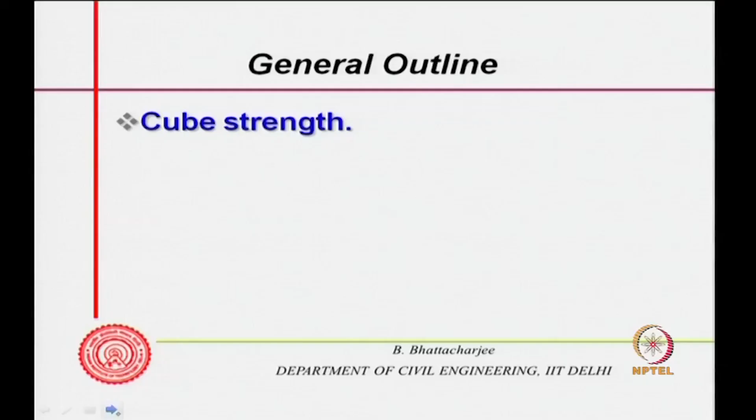The general outline is: cube strength, I will mention why cube strength quickly, then fracture mechanism, and what affects the strength, the mix parameters largely, or basic mechanics. So the mechanism of failure and all that we will look into in this lecture.

Strength of concrete is needed for structural design, and usually we determine it through specimen testing. Since concrete is a structural material and we make structures out of it, strength is required for structural design, because safety is a primary issue. So we determine strength of concrete by specimen strength testing, and the determined strength depends on specimen type.

It depends on specimen type, and of course also on test conditions. For example, strength of a cylindrical specimen is lower than a cube of the same concrete, and in-situ cube strength in a structure is lower than both. So you see, it depends upon the type of specimen you test.

In the Indian scenario, we test cubes, and that is why this heading is cube strength. Not only in India, but Europe and the UK, from where the concept of cube strength came to India, also use cubes. Largely North America, South America, and Japan use cylinders. So the type of specimen is very important, and the test condition also affects the strength.

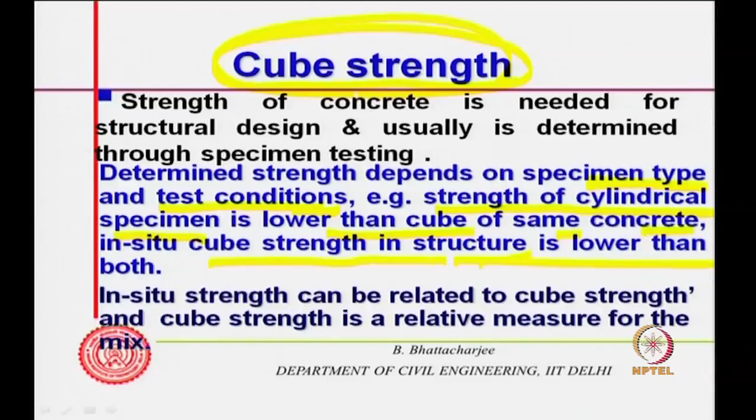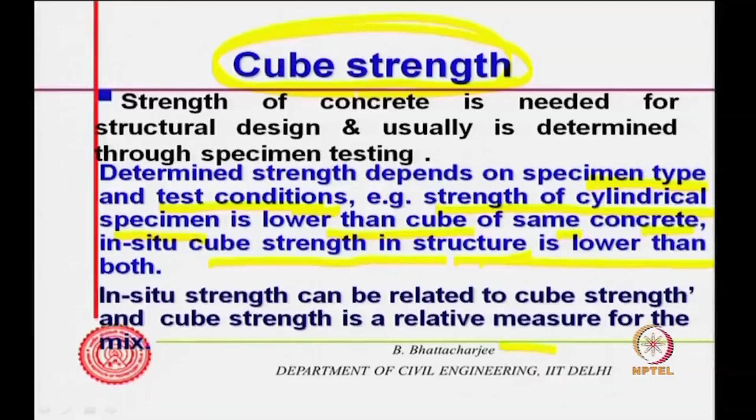Now, in-situ strength can be related to the cube strength in some manner. And therefore, cube strength is a relative measure of the mix that I am using.

We have looked into mix proportioning, its making, casting, and the procedure of production. So basically, since the cube is prepared separately and not taken from the structure, cube strength largely measures the relative strength potential of the mix proportion. Structural strength in the structure is somewhat different, but this relative strength potential can be related to the actual strength one can expect in a structure for design purposes, and therefore can be used in structural design.

Let us see how a cube fails. This is the failure pattern of uniaxial failure. That means I have applied some sort of load on a cube specimen. This is for the cube specimen.

Since in the Indian scenario we largely test only cubes, we will be talking more about cube strength, and many other countries follow the same. In a cube, you apply load through machine platens, maybe a circular one, and the reaction comes from the bottom. Once you have applied load and made it fail, it will fail like this.

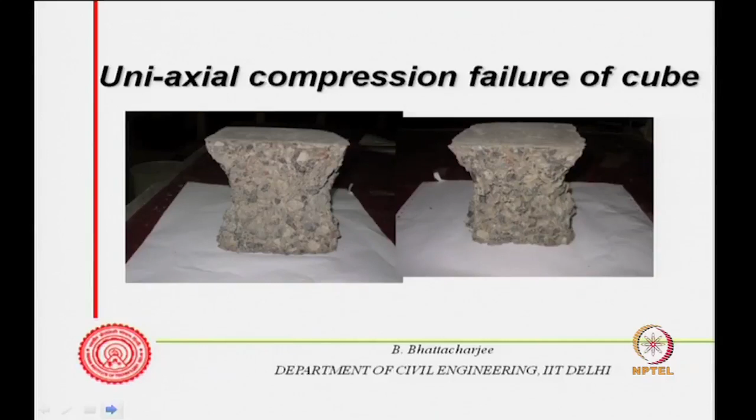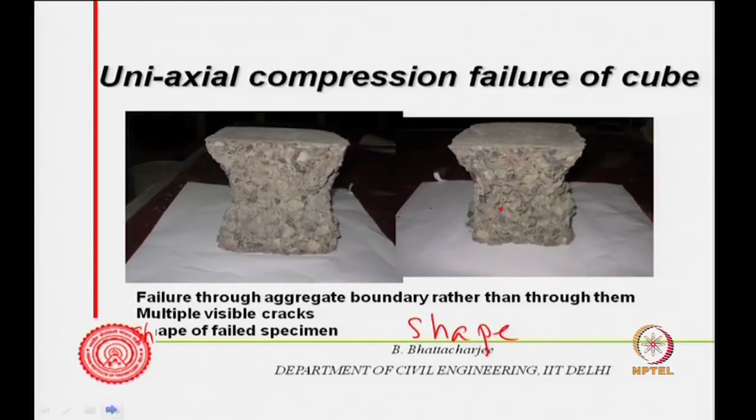This is another diagram from another side, showing that aggregates are exposed and do not fail in normal strength concrete. Failure occurs through the aggregate boundary rather than through the aggregates themselves, and you can have multiple visible cracks. This is the shape of the failed specimen as we have seen. We will explain why we get this shape, but one thing to understand is that in normal strength concrete, failure is through the aggregate boundary rather than through the aggregates themselves.

Fracture plane would be passing at the aggregate boundary, and maybe passing through some mortar and then again through aggregate boundary. If we take a portion of that fracture plane, uniaxial compression failure in normal strength concrete will look like this - these are the aggregates and the mortar around, and you can have multiple cracks here and there, but the failure plane finally occurs through this kind of situation, breaking through the aggregate boundaries. So that is normal concrete, fracture plane passes through aggregate boundaries.

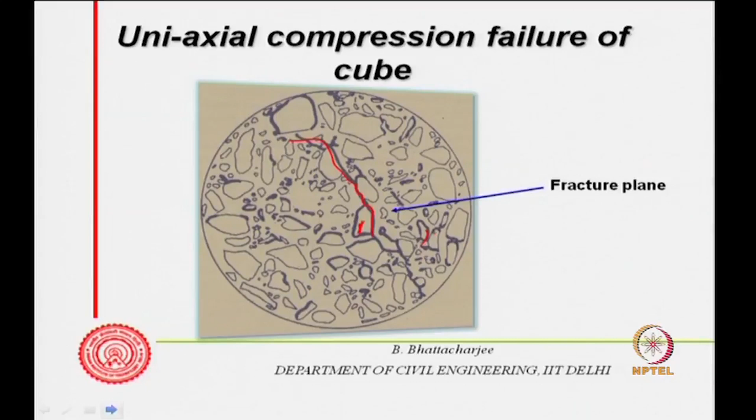What are the phases in concrete? So far we have looked into aggregate as one of the phases, it is very strong in normal strength concrete. In high strength concrete, you try to attain the paste strength such that it nearly matches that of the aggregate strength, and thereby all other phases' strength almost matches with that of aggregate. Therefore, aggregate may also fail in high strength concrete, but in normal strength concrete, up to let us say 60 MPa, aggregate normally does not fail, the failure is through the aggregate boundary.

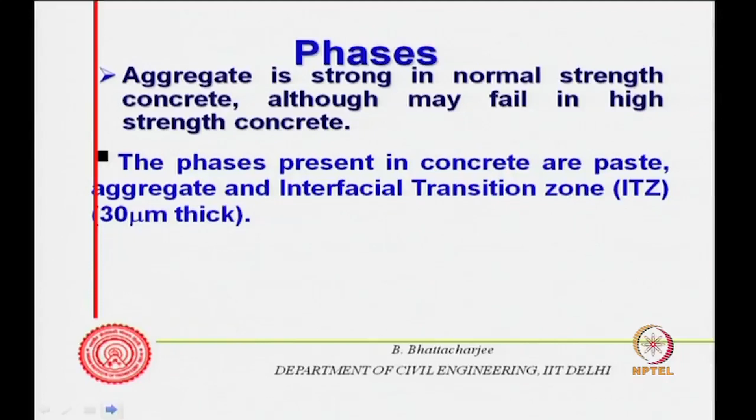The other phase present in the concrete is the paste phase. So paste and aggregate, when I say aggregate I mean coarse aggregate as well as fine aggregate. As you have seen earlier, it is aggregate and mortar, and in the mortar again the paste and fine aggregate system. So paste can be considered as a phase, but one can actually identify another phase.

It is not exactly a phase, but it is a transition zone between the aggregate and the paste phase. We call this the interfacial transition zone. This is nothing but your paste boundary. If this is your aggregate, this is the boundary, and you will have some bulk paste here. This is the boundary surrounding it, and this could be something different in each location - for example, this could be the bulk paste phase.

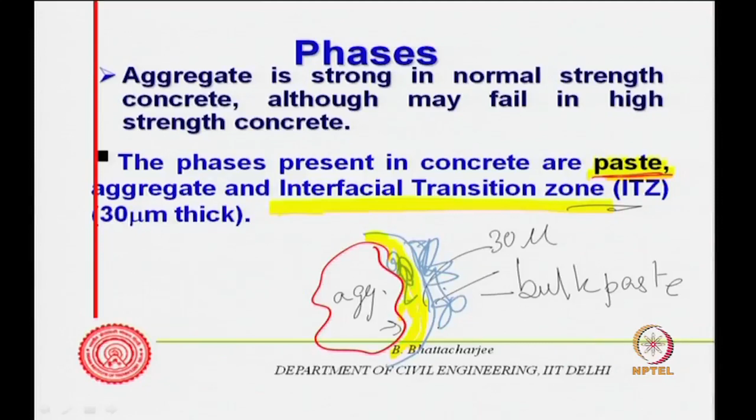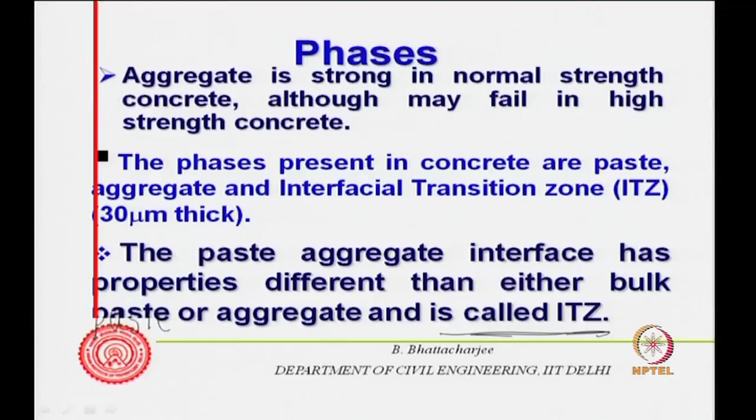So you have got aggregate, and then you have got paste, and then you have got ITZ. The paste-aggregate interface has properties different than either bulk paste or aggregate, and is called ITZ. It is different than the bulk paste itself, or aggregate itself. It is different from paste and aggregate, which is why it is defined almost as a separate phase. Now why this is so, we will be able to understand gradually.

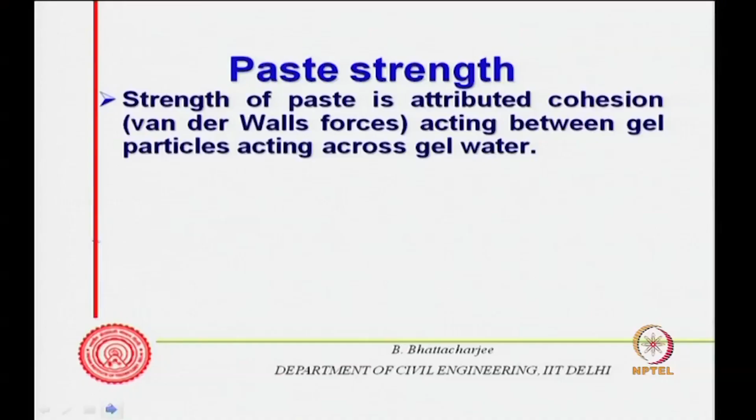Now, strength of paste is attributed to cohesion, because of the C-S-H gel - between the gel particles, across gel water, cohesive forces of something like the van der Waals kind exist. So that is the strength of the paste. If you want to separate it out, you have to actually break this cohesion force, so therefore paste strength could be quite high. A large discrepancy of course exists between the theoretically estimated strength calculated from bonding forces and the observed fracture strength.

For example, if you calculate theoretically you get x strength from theory - why? How? Because the strength per bond is known, the strength per bond is known.

The van der Waals bond - if I know strength per van der Waals bond, and also number of bonds per unit area, then I can calculate the theoretical strength. So I need to know number of strength from theory, that would be strength per unit bond, and if I know number of bonds per unit area, then I can find out strength per unit area. So that is your x, let us say. Now, this can be estimated theoretically.

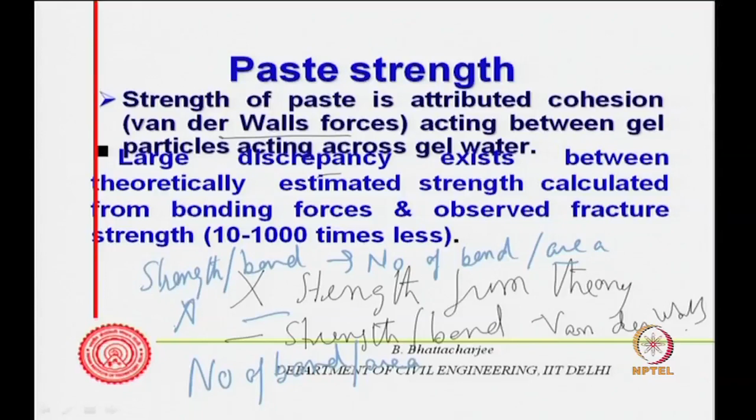What has been observed is that theoretically estimated strength is 10 to 1000 times more. So this x theoretical, or sigma theoretical let us say for tensile strength, is 10 to 1000 times more than sigma actual.

So there is a large discrepancy - whatever you calculate theoretically does not actually exist. Why is it so? The difference has been attributed to existence of cracks and flaws within the material even before any load is applied. So even before you apply the load, the material is not absolutely homogeneous. If you have just the paste, even the paste is not all solid, there could be some flaws. If not cracks, they can come from shrinkage and similar things, but other kinds of flaws would be there, inherent to the system.

For example, capillary pores and gel pores - gel pores of course don't take part, they're too small to significantly influence strength, but they can still influence it. Largely it is the capillary pores which are the flaws within the material. So this difference of 10 to 1000 times is essentially attributed to flaws or pores within the material.

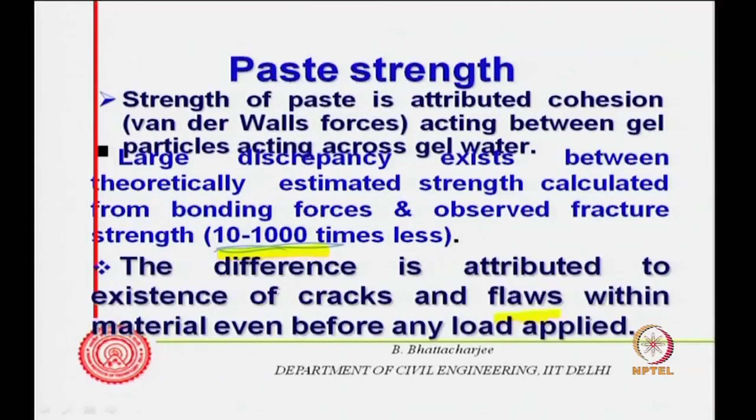On tensile load application, at a critical stress, fracture initiates from existing cracks or flaws and propagates spontaneously when the rate of strain energy release is higher than the rate of energy required to create new fracture surface. So what is failure or what is fracture? Failure means the material is getting separated out under tensile load, let us say.

So if we have some material and I am applying pull from this side, pull from this side, somewhere the material gets separated. So this material is getting separated. Now this separation means creating new surface - you are creating a surface here and creating a new surface there. So it is actually now creating two new surfaces, which are matching of course. By pulling them apart, you have actually created two new surfaces.

Now each surface is associated with a kind of surface energy. There is an interface between solid and liquid, or solid and air, or air and liquid. At the interface there is always some sort of energy associated with it, because the material will be pulled. It will be interacting with materials along all directions - on one side it will have cohesive forces which will pull it, the other particle on the solid side will pull, whereas here there is no such material. So there is a kind of surface energy existing at the surface, and this occurs at any interface.

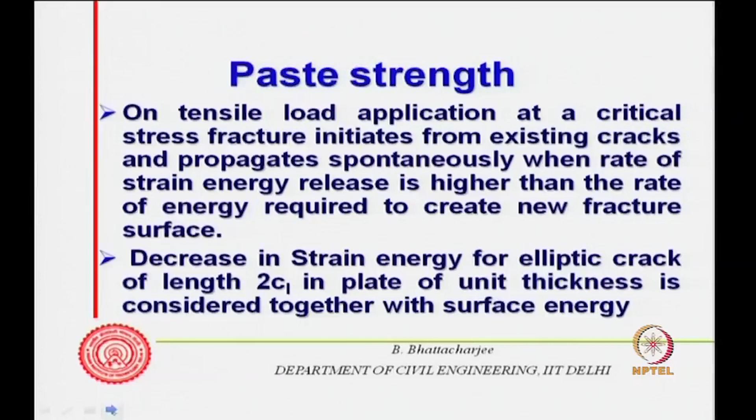This is what was actually postulated by Griffith somewhere around 1918 or so, maybe the second half of the second decade of the 20th century, when he was looking at the failure of glass or such brittle material. So decrease in strain energy for an elliptic crack of length 2c_l in a plate of unit thickness is considered together with surface energy - that is what he did. Let us see what he did. Well, I think I will come back to this diagram, but let me look at one more diagram slightly later, and then I will come back.

Let me go back to my earlier slides and draw it for the sake of explanation. Supposing I have a surface, something like this, there is a hole and this is my material, and I am pulling this material from this side, then what will happen?

This crack will try to expand. Now, if this hole tries to expand, the fracture propagates along this direction, that means it creates new surfaces here, new surfaces here.

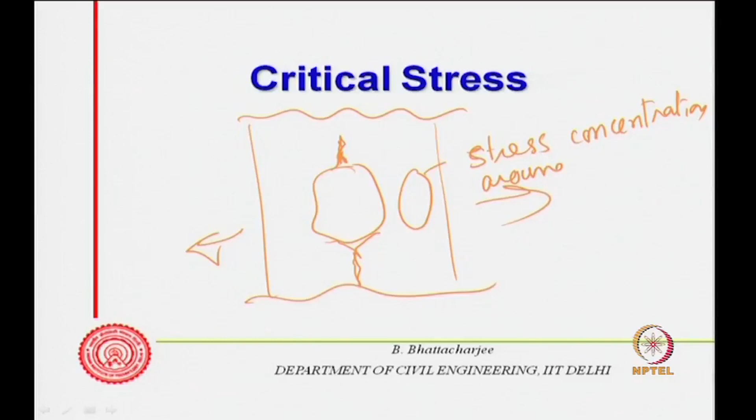Now, the stress around a hole, for an elliptic hole, one can estimate stress concentration around an elliptic hole from elasticity theory. And if you apply more load, what would be the further stress, that one can find out, and correspondingly the strain energy one can find out.

Expression for strain energy, these are available from existing solutions of elasticity theory, and then the rate of strain energy change with this crack width 2C, or 2CL if I call it, was actually determined. From this, if you equate that rate of strain energy, in the limiting case, rate of strain energy release is equal to rate of surface energy required.

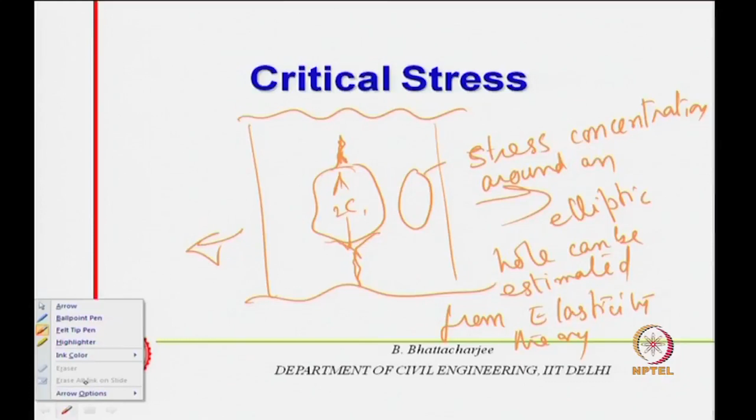So if you equate this, you can find out what is called the critical stress. Critical stress is that stress at which the fracture will propagate spontaneously. So that was the idea.

So this is the released energy, pi C squared sigma squared, and half crack length is C in this particular case, and 4CT is the fracture energy, because T is the surface energy and thickness is taken as unity.

So you can assume there is a plate under tension with unit thickness. The area would be two surfaces if half crack width is 2C. So crack width itself or hole itself is 2C, its width will be 2C. This is your elliptic crack, this is 2C, this is 2C into thickness T which is unity, into 1, and this side again 2C. So 4CT is the surface energy per unit area.

So 4CT is the surface energy. Now, required surface energy, because 2C is this full length, C is half crack length, so 4CT. And correspondingly, from the stress concentration concept, from theory of elasticity, one can find out pi C squared sigma squared by E is the released energy.

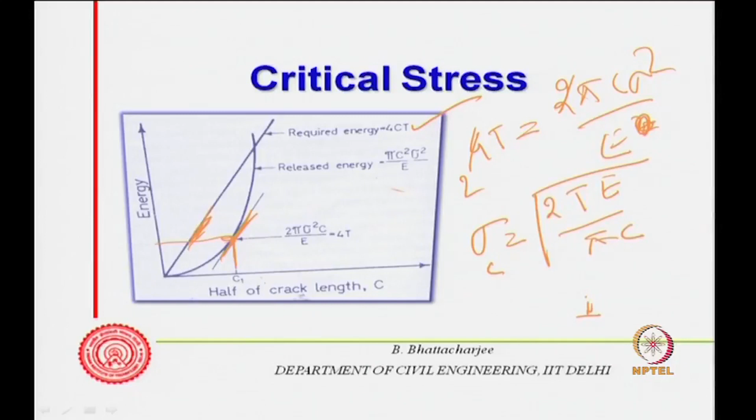That is critical stress. Sigma t is equal to square root of 2ET by pi C.

You can see the critical stress at which fracture will propagate spontaneously is a function of the half crack width. If already some cracks or holes are existing, they would behave like that. This is the critical stress sigma t, elastic modulus, energy required to create new surface, and this is the crack length of the elliptic crack. This is under tensile forces, and this is how it will behave. This plays a major role.

If already some holes are existing, and their dimensions are larger, the critical stress will be less. Fracture will start propagating from them at some stress, that is sigma t.

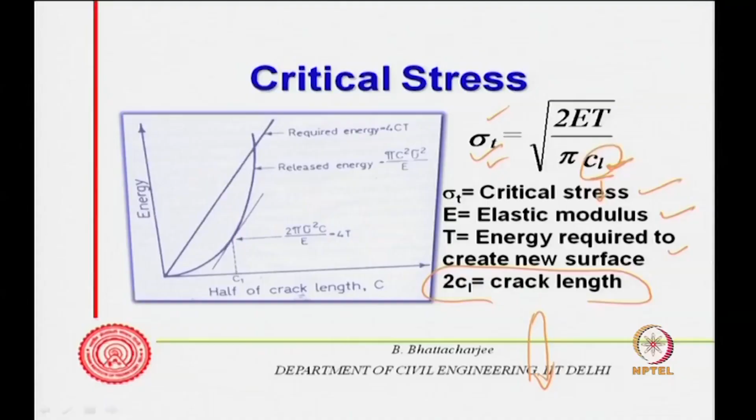In concrete you have a lot of capillary pores, and therefore multiple cracks would actually generate. This is your required energy line. Here it will not be a single straight line, because it will be the sum total of a number of straight lines.

Because there are a number of holes, at some sigma 0 cracks will start propagating at C0, at some other sigma 1 cracks will start propagating from smaller sized voids or holes or pores that are existing, and so on. That is for the multiple cracks in concrete - multiple holes in concrete, and from there the crack starts propagating.

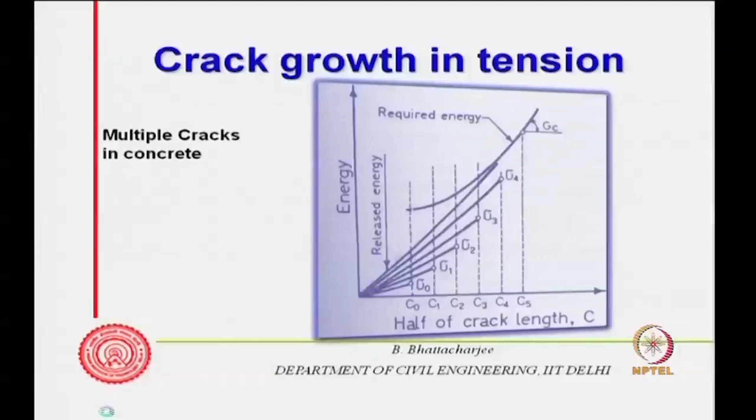The crack will start propagating from the largest hole, even if there are no shrinkage cracks. If there are shrinkage cracks, it can propagate from there. Whatever is the largest hole or flaw in the material, the crack would start propagating from there, and then possibly join with cracks in the mortar occurring elsewhere. Once they join all together, the failure or overall fracture occurs. That is how the mechanism of failure of concrete works, and this we can understand.

Supposing I apply tensile load to concrete, it should ideally fail like this for uniaxial tensile strength, because this is a brittle material. So it is weak in tension, because particle bonds are not very strong.

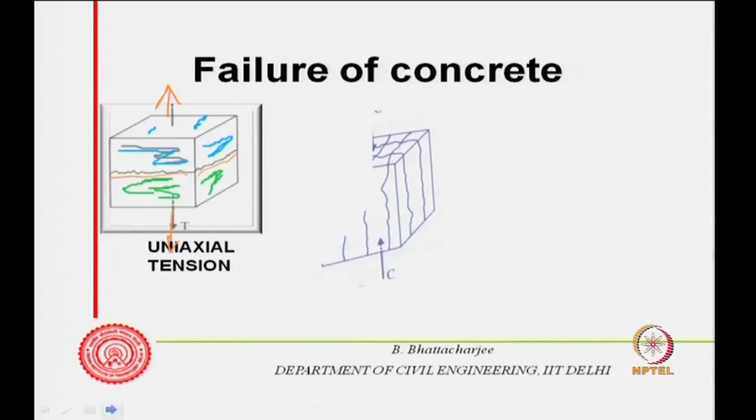If you look at uniaxial compression, applying load from this side to this and this side to this, it might develop multiple fractures in ideal uniaxial compression, because the material is strong in compression. Let's go to the next diagram, and then we will come back again.

Supposing I apply biaxial force, from this side and from this side. What will happen when I apply force from this side? The material will try to move away in this direction, and when I push it from this side also, the material will try to move towards this direction. Therefore, you will have cracks like this.

In case of cubes, whenever you are applying load, the material has a tendency to move along this direction because of Poisson's effect.

If it is biaxial, applying load like this will cause further movement. In the biaxial case, you can see the cracks are vertical - that means material is trying to go away along this direction. Tension acts along this direction, and the crack comes because of tension. In the uniaxial case, the crack can come in both directions, for uniaxial compression.

If you now recall the situations where we had seen from both sides, we saw the failure plane looking like this on both sides. You had something of this kind. If you remember, the failure plane that we have seen earlier were something of this kind.

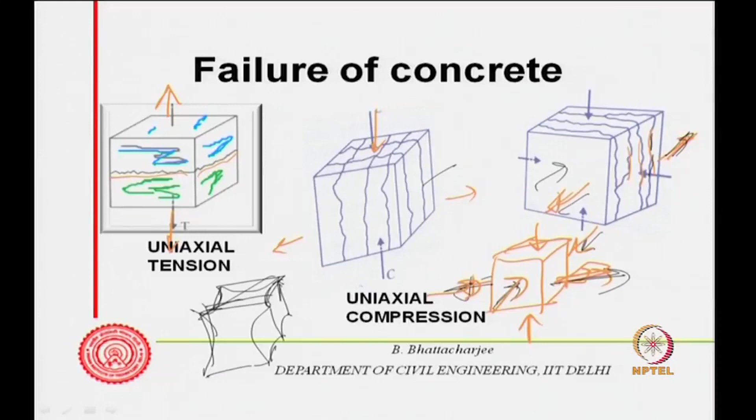The failure plane we saw in case of concrete occurs because under uniaxial compression, material will try to move in the transverse direction, and concrete is weak in tension. Therefore, it will fail. If you apply compression from all three directions, a triaxial situation, it can withstand a good lot of load.

Physically, you can understand what will happen if you try to compress it from all sides. Simply the voids will get reduced, and possibly all particles will come close to each other. After that, crushing at the atomic level is not possible.

So it can take an enormous amount of load under triaxial situation. Biaxial, of course, has no tension, so that is a separate issue. It can take much larger load under triaxial situation. Biaxial failure will be like this, uniaxial failure will be like this. So failure of concrete, even the compression failure, essentially occurs not really by compression, but because of the tension in the transverse direction.

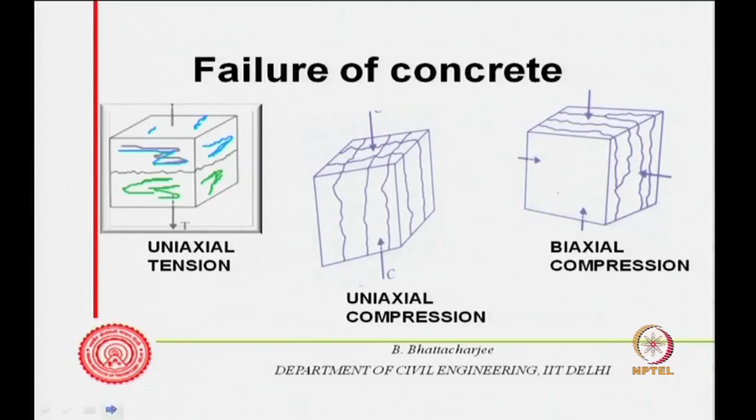Let us see something more about tension in the transverse direction. So this is what it is. Supposing you are applying compression like this, there will be tension along this direction. So if you have a capillary pore, large pore, large fissure, or a kind of crack, whatever it is, the crack will propagate in this manner, even under compression.

Once the crack has propagated up to this point, this is the 2C. So you can see the compressive strength is also related to sigma t critical that we talked about. Uniaxial compressive strength will be related to that critical stress somehow. It is not very easy to model them, but it will be somehow related to sigma t. That relationship perhaps is not so easily understood; it will require more research.

So that is it. Therefore, what we have understood so far, let us quickly relook at it. Failure of concrete takes place through the aggregate interface in normal strength concrete; in high strength concrete it can occur there too. We will come back to that interface a little bit more. An interface exists which is a transition from the aggregate phase to the paste phase, around 30 microns. If you look at the failure of concrete, the failure occurs at the aggregate boundary, so this phase which we call interfacial transition is important.

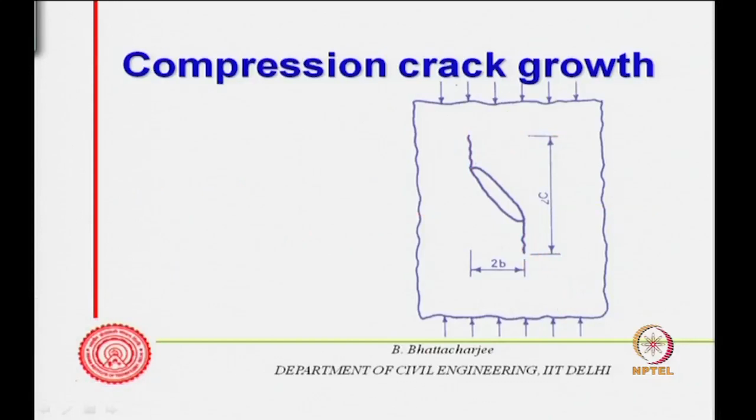Now, concrete under compression also fails in tension in the transverse direction, and that is what we have just looked into. We will follow it up further. So crack growth in compression due to transverse tension, that is most important to understand.

So if we look at the previous relation, sigma t was something like the square root of 2 E gamma divided by pi into C, where C is the half crack width. If we assume we do not really have shrinkage cracks in the situation, since large shrinkage cracks will not necessarily occur in concrete, then this C would correspond to something like a pore radius of the flaw that is existing. So it will be something like pore radius. Therefore, some sort of measure of the pore radius, C will be related to pore radius, and gamma, of course, is surface energy.

E is the modulus of elasticity of pore free solid, and surface energy is also that of pore free solid. So, if I consider a pore free solid and find sigma 0 for it, for a porous solid this can be related to sigma 0 into 1 minus p, because more porosity means effective E gets reduced, and effective T also gets reduced. This is a simple model, could be much more complex, but one can fit an empirical relationship of compressive strength with sigma 0 times 1 minus p into another constant.

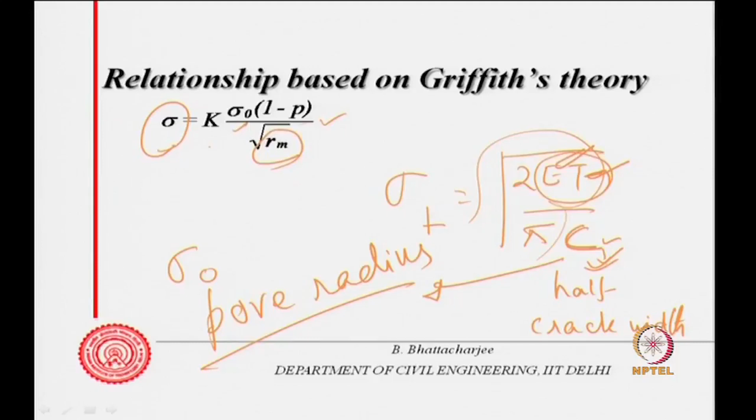So this is the mean logarithmic pore radius, because pore radius varies in logarithmic scale, from nano size to a fraction of millimeter size, over a large range. So it is better to express them in log scale, and this log mean radius is a weighted average with respect to volume. This is called mean distribution radius.

Sigma t, if you recall, was something like this, and therefore one can write E0 T0, where E0 T0 stands for pore free modulus of elasticity and T0 is the surface energy for pore free material, when some porosity already exists in the material. Both can be written as E0 into 1 minus p, and T0 into 1 minus p. If you take it out, the constant comes out with 1 minus p, and critical stress will be something like this.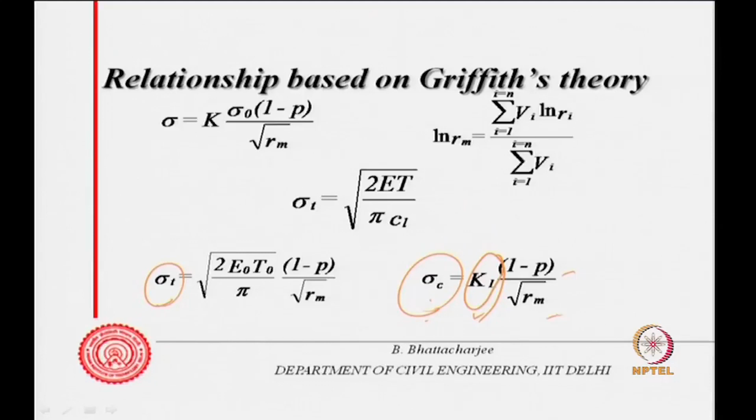One can write compressive strength as a function of this critical tensile stress as well, because compressive failure is also failure due to tension in the transverse direction. So one can empirically relate sigma c to 1 minus p divided by root of r m. This is a simple qualitative relationship just to understand that cube or cylinder compressive strength will be a function of the porosity of the concrete, and also a function of root over mean radius, the mean distribution radius.

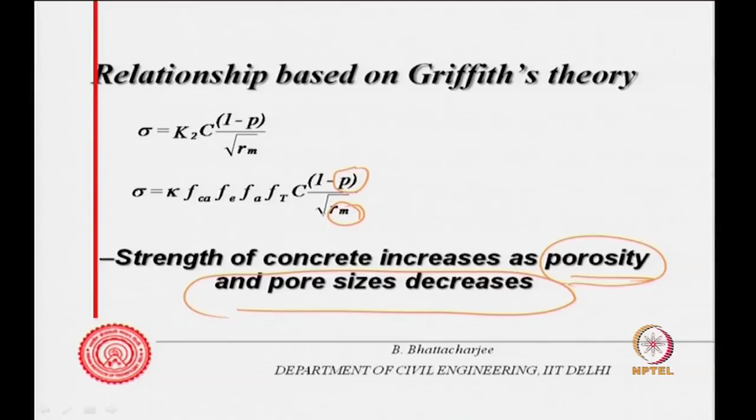There has been relationship developed along this direction, while also putting in cement content or various other factors. The most important thing to understand is that strength of concrete increases as porosity decreases and pore size decreases. Strength of concrete increases as porosity and pore size both decrease. If porosity decreases, strength increases; if pore size decreases, strength increases. This is fundamental to understand.

Now, volume of pore and pore radius can be obtained from what is known as the pore size distribution curve. I will not go into the basis of this, but the volume of pores can be related to the mean radius, some dispersion coefficient, and overall porosity. So volume of porosity, the cumulative volume of porosity, can be related to mean distribution radius. V can be expressed, where V is the cumulative porosity at any point, the intruded volume from mercury intrusion porosimetry, but let's say this is the cumulative porosity.

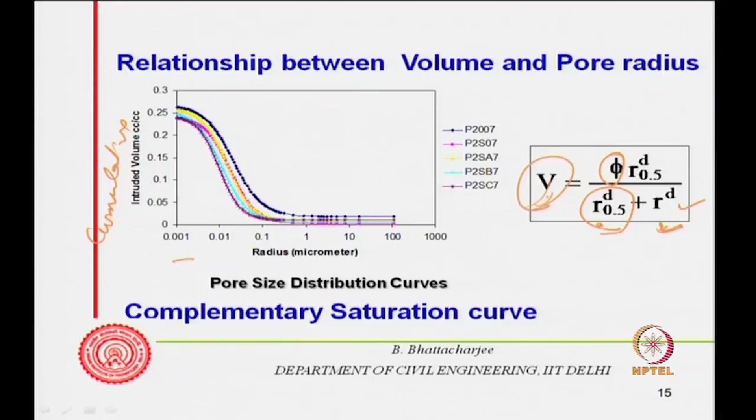Cumulative porosity can be related, from small pore size to other pore size. So porosity can be related to cumulative porosity in terms of mean distribution radius and overall porosity. And therefore, I can express this as mean radius, which is same as r m, this r 0.5, median radius equals r m, or it is called mean distribution radius.

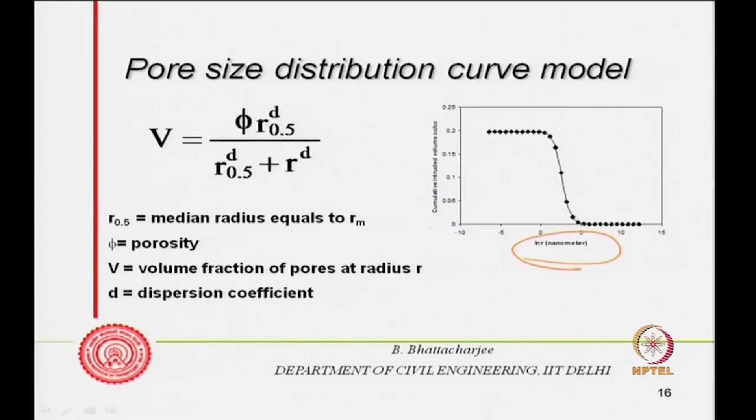V is the volume fraction of pores at radius r, and this is some dispersion coefficient, this is overall porosity. All I am trying to point out is that there can be a relationship existing between cumulative porosity and r, and from this you can actually obtain ln r versus cumulative porosity. This sort of curve one can obtain, but what is its implication in our case?

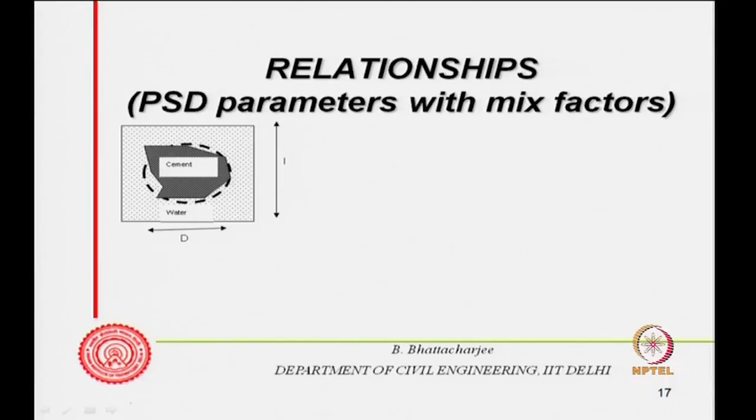We can actually find out the porosity by assuming a simple model. For example, this is the cement, this is the water all outside, and we can express R 0.5 and D in terms of mix factors. So through some models, if I know R 0.5 as a function of W by C, degree of hydration, age T, etcetera, then I can get the full pore size distribution.

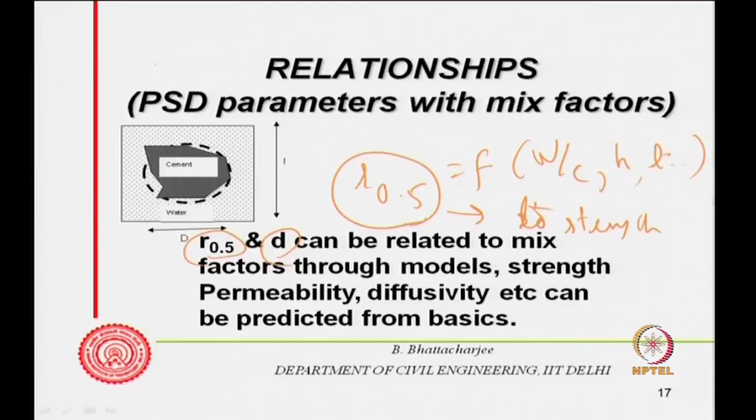And we know that R 0.5 is related to strength, this is related to strength, this is related to strength. So therefore, strength can be related to, strength can be expressed as a function of W by C, H and T, because strength is a function of R 0.5.

R 0.5 and phi. Now phi can be estimated from Power's model. R 0.5, if I can relate to water cement ratio, degree of hydration and time, then I can relate strength to all this. So it is possible to

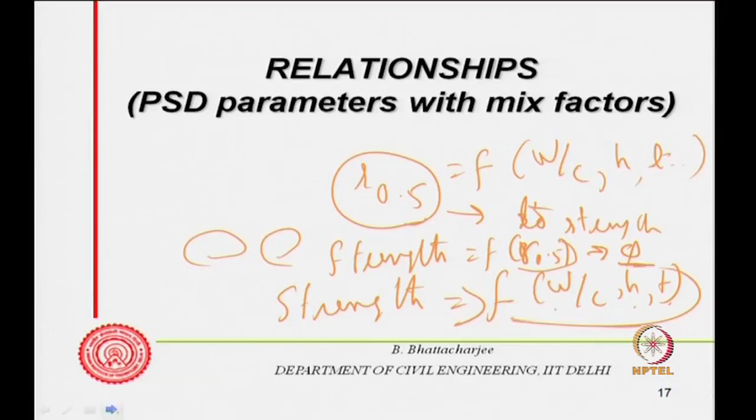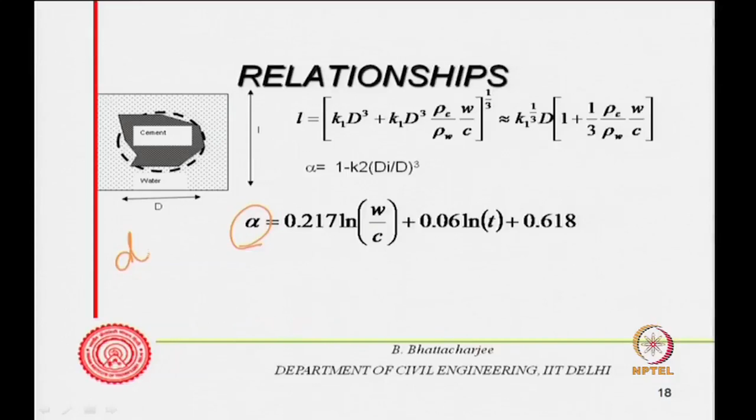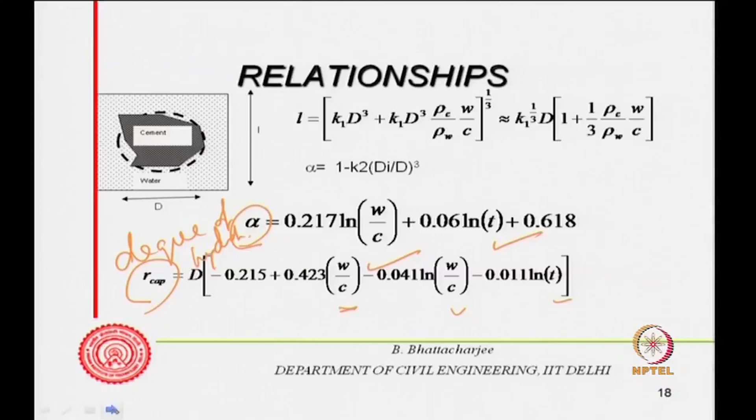use a simple model to arrive at R 0.5 and D as a function of water cement ratio, and this is just as a qualitative term. I do not think I will go into the expression of algebra, but what I had mentioned is that R can be related to the degree of hydration alpha. This can be related to age and water cement ratio, and R capillary, mean capillary porosity can be related to water cement ratio and age, and overall R 0.5 also can be related, for the gel pores, it can be related to water cement ratio, because this is related to water cement ratio and this is also related to water cement ratio and time, age.

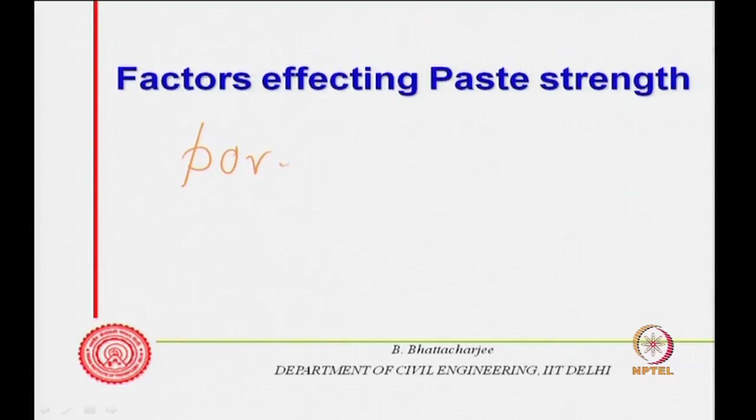So using this kind of model, one can calculate the segmentation age. If you remember, we talked in terms of curing, and theoretical and estimated segmentation age seems to match somewhat. Anyway, that is not my concern, but I am trying to point out that R 0.5 can be related to water cement ratio. That means the pore size is related to W by C,

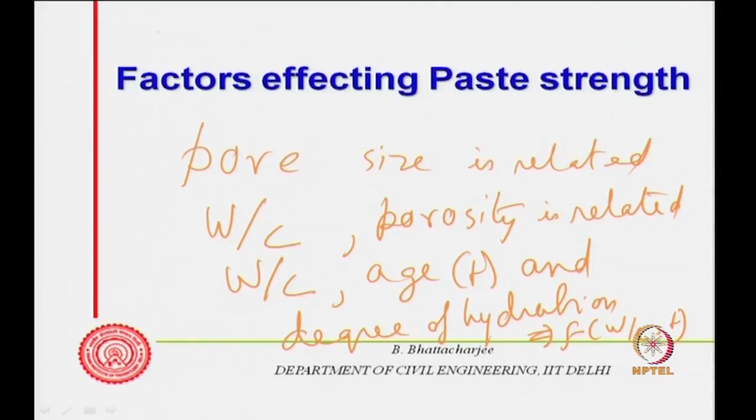porosity is related to W by C, age and T, that is age is T, and degree of hydration, age is T and degree of hydration. Now, degree of hydration itself is a function of W by C and T. So degree of hydration is a function of, so therefore, porosity and pore size is related to water cement ratio, and we have seen that pore sizes, mean pore size and porosity govern strength.

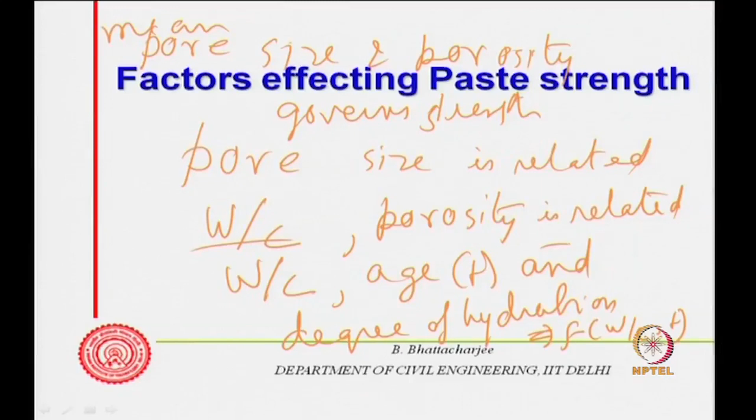Hence, strength is governed by water cement ratio and age. So just let me put it in words now. Let me put it in words. You see what we have seen, the R 0.5 is a function of R 0.5 gel, to some gel porosity, and it is a function of water to cement ratio and age. Similarly, R 0.5 capillary is also a function of water to cement ratio and age, and we know the porosity itself is a function of water cement ratio.

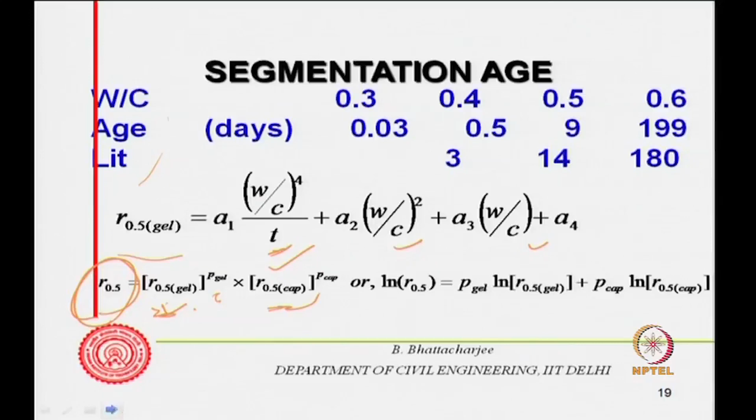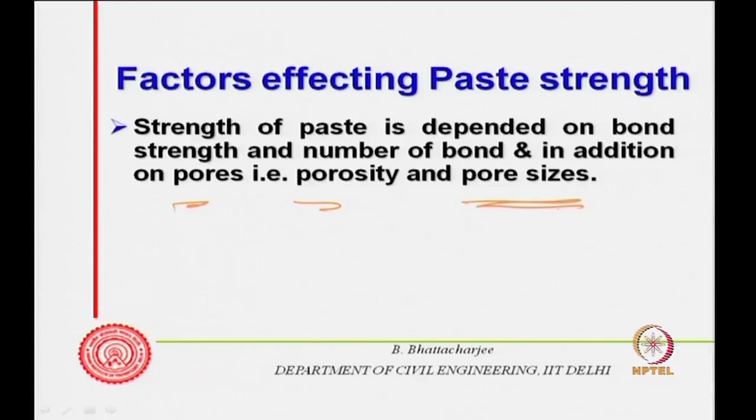So in other words, what we are trying to say qualitatively, quantitative we can leave out, is strength of paste depends on, of course, bond strength and number of bonds, but it is mostly dependent on porosity and pore sizes. This will be the main contributive factor in normal strength concrete, and capillary porosity and total porosity is dependent on water cement ratio, that is what we have seen, and pore size is also governed by water cement ratio. That is what just now we have seen.

So pore sizes, both pore sizes, so porosity increases with W by C, pore size increases with W by C, and if porosity increases, pore size increases, strength decreases. Hence, strength will decrease.

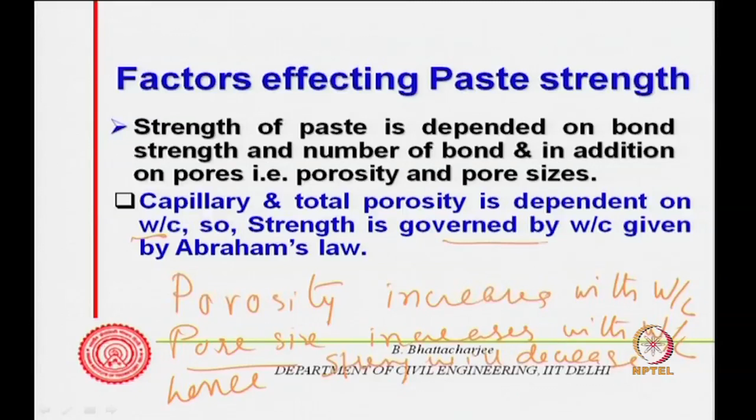Hence, strength will decrease. That is what is Abraham's law - total porosity dependent, so strength is governed by water cement ratio. That is what is given by Abraham's law, and Abraham's law is something like this: strength is a function that inversely reduces with water cement ratio. These are two constants.

Why does it reduce with water cement ratio? Because higher the water cement ratio, porosity will increase, and the mean distribution radius will also increase. We have seen that strength is a function of porosity - higher the porosity, strength is lower, that is 1 minus P. Higher the mean distribution radius, strength is lower, because it is related to under root 1 over under root mean distribution radius. That is why strength is a function of water cement ratio.

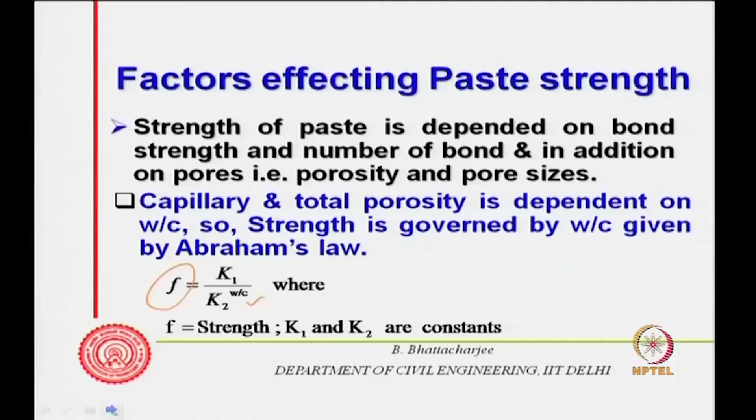That is what was discovered by Abraham in the 1920s and 30s, very early 20s actually.

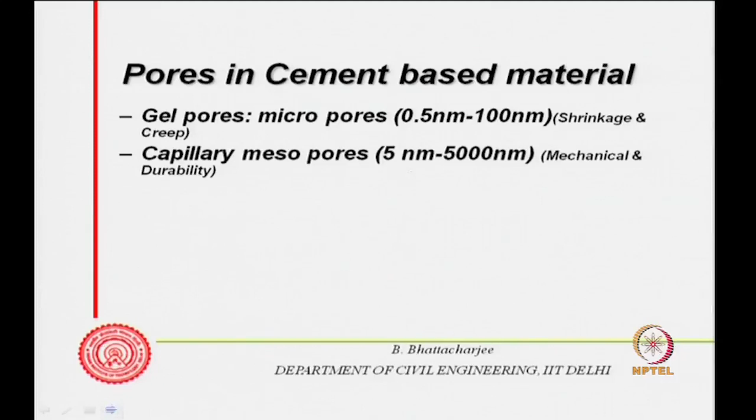So what are the pores in cement based material? I think I have talked about this earlier - gel pores is one of them, capillary pores in the cement paste, and macro pores due to air entrainment and poor compaction. All this will affect the strength, but of course this affects the strength less because the size is very small. Larger size pores affect strength more, so their effect on strength is less, but they actually have a bigger role in shrinkage and creep.

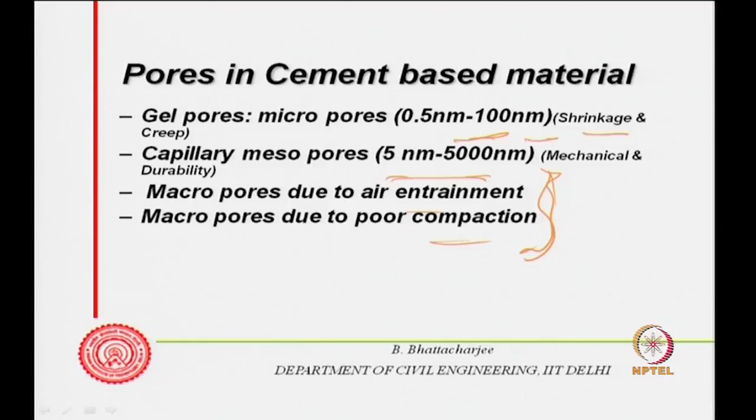And of course, in concrete you will have ITZ porosity, and this ITZ porosity comes because of the wall effect, which we have already talked about in relation to aggregate packing. At the boundary of the aggregate you will not have good packing of the cement particles. Then one-sided hydration product will grow from the bulk paste side, not from the aggregate side, and if shrinkage occurs, paste shrinks, aggregate does not.

Bleed water has a tendency to come up because its specific gravity is low, and if it gets trapped below an aggregate, there will be bleed water trapping. So bleed water trapping and all this makes this zone, the aggregate mortar interface, vulnerable. There the porosity is more, more porosity, more pores, because of the wall effect.

Hydration growth will take place for the cement particle. If I have a cement particle here, their packing will not be very good, and hydration will take place more along this direction, very little along this direction. Shrinkage will occur there. So even before any load has been applied, you might have some sort of fissure existing here, because you will have materials there. So you will have fissures or plate-like pores existing there.

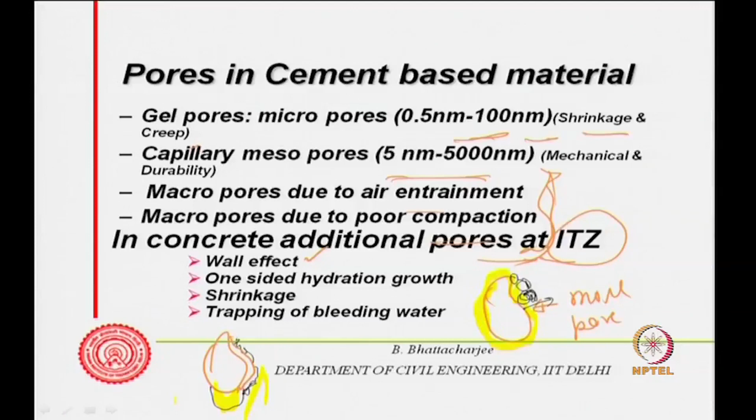If bleed water comes and gets trapped here, because some water tries to go up and gets trapped here, then you will have again some sort of fissure existing there. These are the ones from where fracture starts propagating, because they are the largest size pores. From there fracture starts propagating, joining some of the pores in the bulk paste, and when all of them have joined, overall fracture will occur.

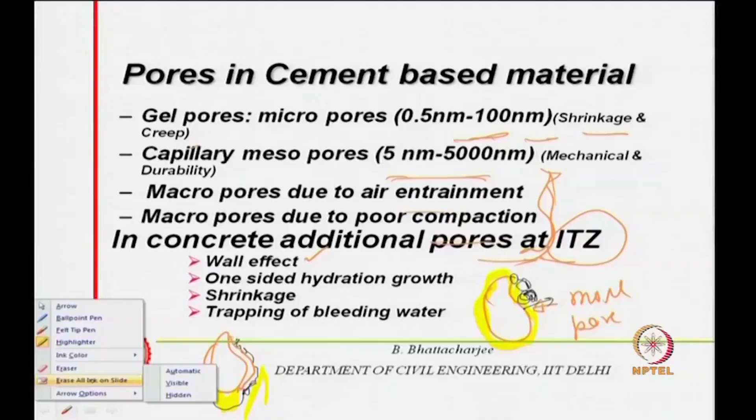Let us progress further. We have understood that ITZ porosity governs the strength of concrete, because they will have the largest porosity, up to about 70% of ultimate load. Cracking is largely due to ITZ cracks.

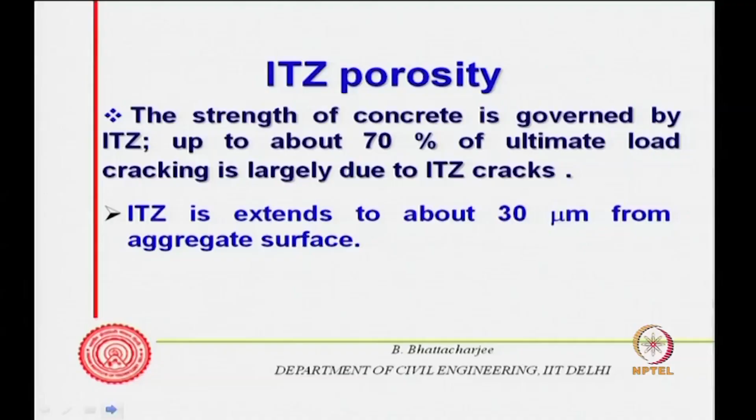Because ITZ would have larger fissures, and from there crack starts propagating. As we said, it extends around 30 microns from the aggregate surface, and bleed water trapping below aggregate is mentioned in connection with bleeding.

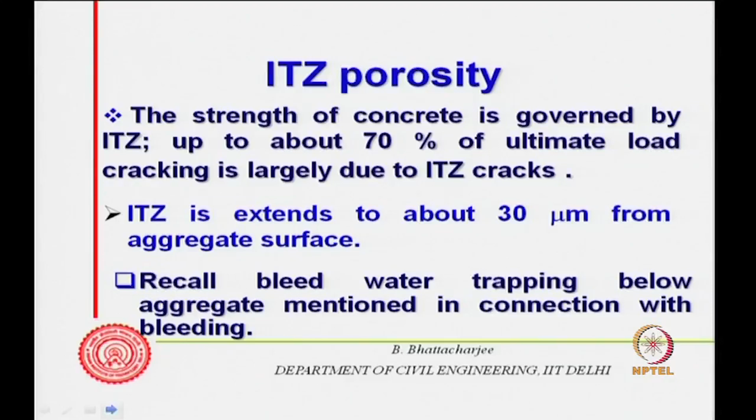We have not talked much about bleeding, but let me explain now, because concrete is made up of materials having different specific gravity. Cement has a specific gravity of 3.15, aggregates will have something in between, if I am not using very heavy aggregate like hematite in heavy concrete.

So in ordinary concrete, aggregates will have around 2.6, 2.7 or at best 3 as specific gravity, but water is 1. So it will have a tendency to come up all the time, and in case of heavy bleeding with high water cement ratio, cement is not able to hold the water, water will have a tendency to come up and it might get trapped below the aggregate. If it gets trapped below the aggregate, that will be a fissure.

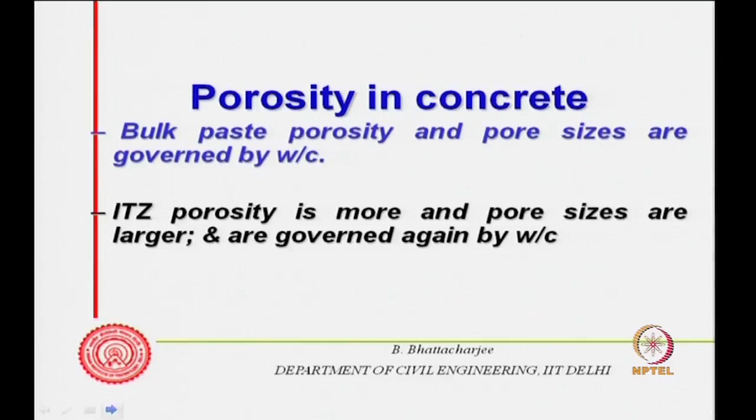All this we have just mentioned a few minutes before. So therefore, bulk paste porosity and pore sizes are governed by water cement ratio, as we have seen. And since water cement ratio governs this, ITZ porosity is also more and pore sizes are larger, and this is also governed by water cement ratio.

Larger water to cement ratio means bleed water trapping chance could be higher, along with shrinkage effects, and even the porosity in the ITZ is always more than the bulk paste porosity. High water cement ratio means bulk paste porosity is more, ITZ porosity will be still more. So that is what governs the strength in normal concrete.

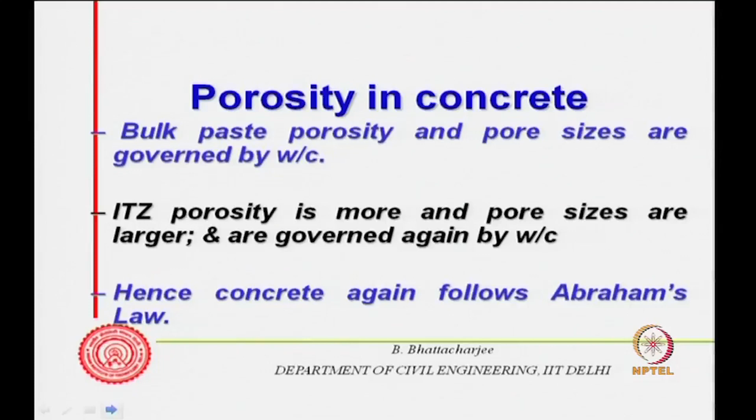Hence concrete follows Abraham's law. So cement paste follows Abraham's law, mortar will follow Abraham's law, and concrete will also follow Abraham's law. And that is because...

Higher the water cement ratio, I will have more pores in the system, because we have seen in the earlier modules that capillary porosity is a function of water cement ratio. More the water cement ratio, more will be the capillary pores. When you looked at the hydration process, if you recollect, we talked about the expanding cluster model: more water cement ratio means more pores, more capillary pores.

And the size of the pore will also increase with water cement ratio, as we have seen today. Therefore, higher the water cement ratio, strength will be lower, both for cement, concrete and mortar as well.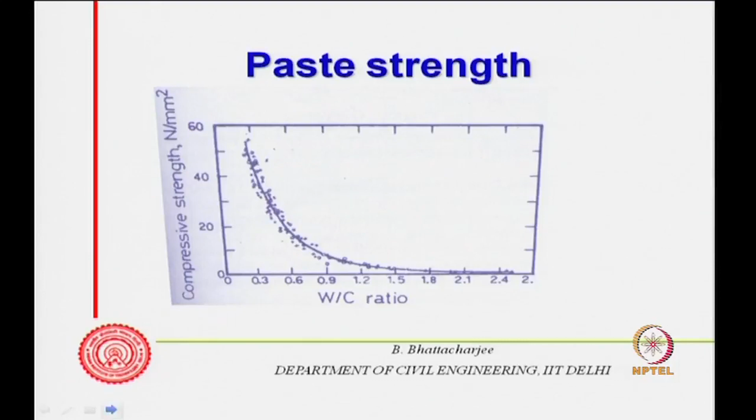And this is what possibly the next diagram will show, for paste strength or mortar strength or anything of that kind: water cement ratio versus compressive strength. Higher the water cement ratio, compressive strength reduces.

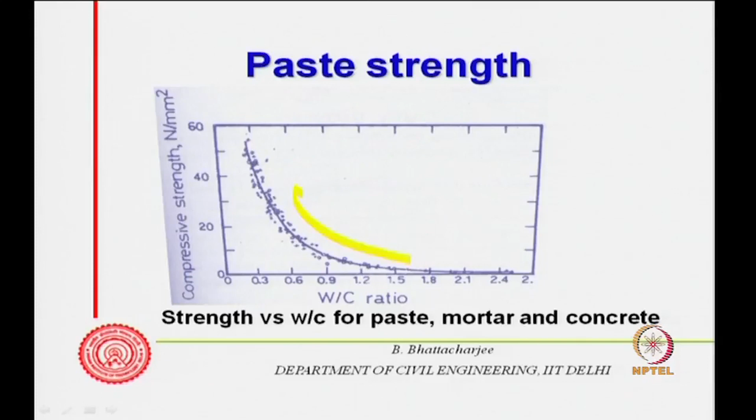So therefore, this is the fundamentals. Water cement ratio is the fundamental factor which governs the strength of concrete, and that is what we have understood today. And why does it affect strength? Because higher the water cement ratio, I will have more capillary porosity, and my pore sizes will be larger.

And the size of the pore governs the strength. Larger the size, the critical stress required to initiate fracture from those pores will be smaller, which means the crack will start generating first and propagate faster. And also we have seen that compressive failure is actually because of tensile failure again.

So therefore, this is what we have understood. We will see the role of aggregate and other things in subsequent classes. We have essentially seen the role of paste, role of ITZ, mainly the role of porosity and water cement ratio. So the first lecture gives us this idea of why strength is a function of water cement ratio. It is very important to understand that strength in this kind of material decreases with increase in water cement ratio. So therefore, the trick in getting high strength concrete is using reduced water cement ratio, reduce it as much as possible,